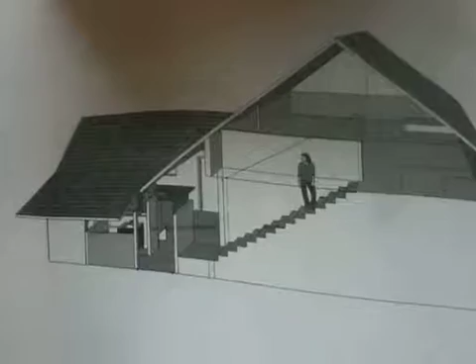Hi, Wells. I got your email and the attachment of your plan project, and I printed them out so I have a better idea of what it is you're doing.

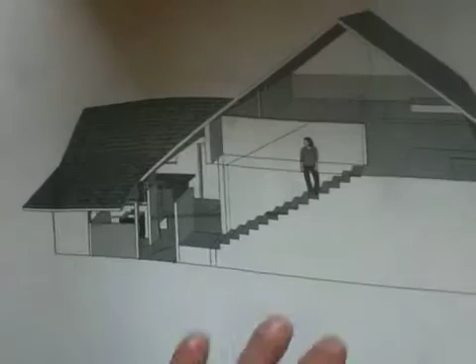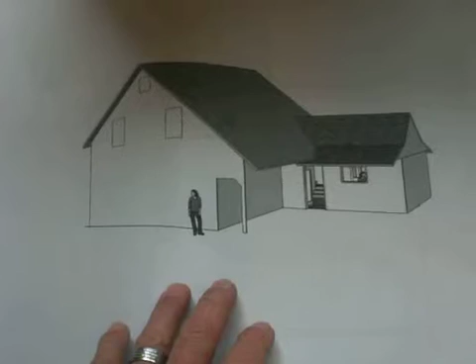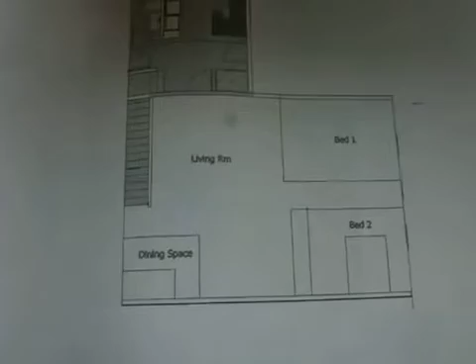I know you're not done with the design, and it's obviously a little difficult to quote on any kind of a figure based on these plans, but we will need obviously more information and details as you get up to Sequim, and then fine-tune some of the plans and the design and how it attaches to the main house in the future. But I do have some commentary that we could go over the phone when you're available.

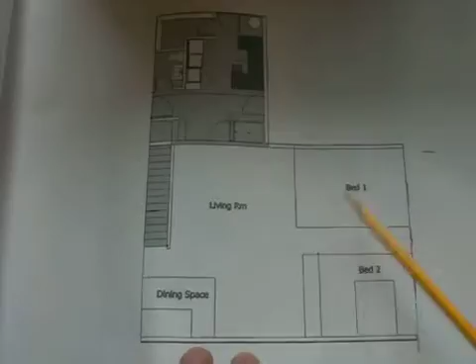So real quickly, there are issues with septic and how big, and if these are going to be permanent bedrooms. Don't want to use up bedrooms if the system isn't going to be big enough for the final house. That would be over here.

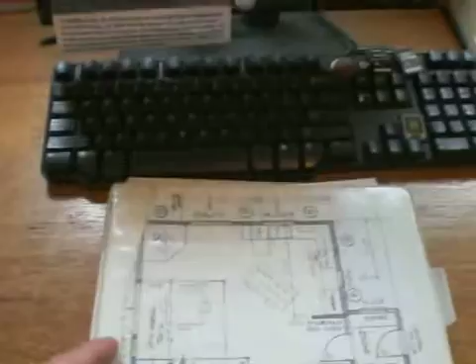So once this section of the house was done, they moved into this half of the house, and then we gutted the first floor over here and rebuilt the rooms for other purposes. So this particular project is here in front of me. Here is kind of the layout. Here's the mudroom I was talking about. And then there was a laundry room which connected to the existing bathroom, stairway, dining room, fireplace, kitchen.

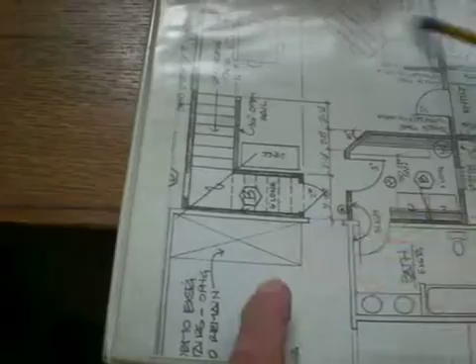And then this was the old stairway, which we gutted out 2 years later. They were living in this half, but we gutted that out and refurbished that whole area so the upstairs had a new entranceway. So I'm getting to some other financial details. So that's the kind of plan that we're going to need professionally for the city.

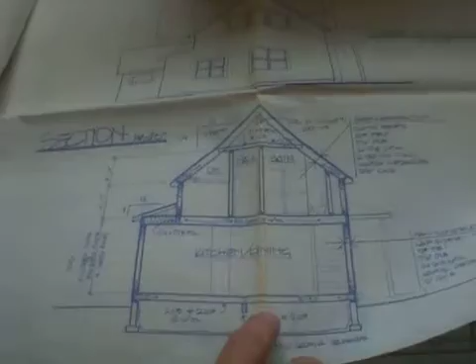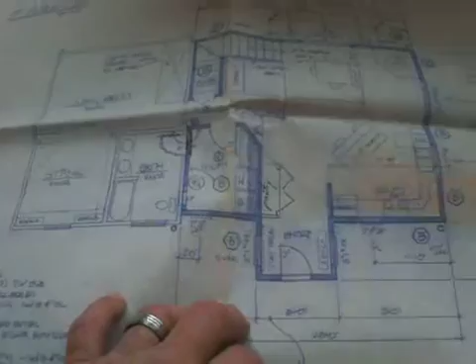So city or county, whichever, we need quite a bit of good detail from the architect or plan drawer. I mean, we could do it ourselves on a napkin, but the city and county, they want some pretty good detail. We are able to make some detailed changes inside as we go along, but not great massive changes. Here's the upstairs. So we have bathroom, walk-in closet, and a stairway up there. And then they connected the upstairs here to the other upstairs here so that they can get to these bedrooms.

And related to sizing up the two different projects, yours and theirs, their main floor was 720 feet, 560 for the second floor, for a total of 1,280.

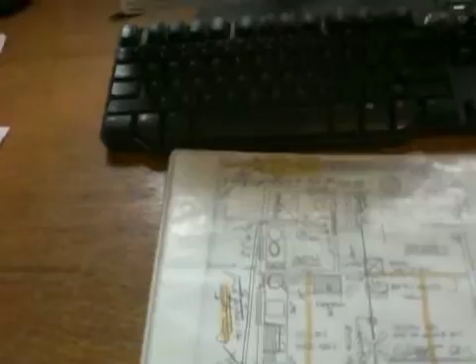So this is the kind of binder I put together for the course of the project, so we know what is going on. Here is another one, which is probably... where is it now? Stand by for a second. Oh well, five. Here it is right here.

So this old little cabin, there's a main house next to it that you can't see, but it was old, probably built in the 60s, based on the building techniques. And so we gutted that out, started all over, took off this addition they had on the front, and redid everything. We had to level up the concrete floor. So in this particular case, new roofing, new walls, interior.

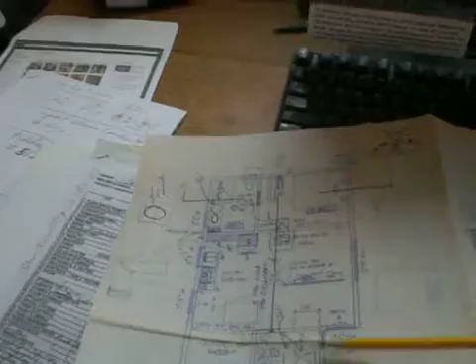In this case, we took what was existing, started over, and did everything on the inside. New cabinets, new sheetrock, plumbing, everything. When we gutted this out, it was completely down to studs and nothing was inside. And so this was insulation, finish, and that was a 24 by 30. Let's see. Technically there was an existing bathroom and bedroom in it, so we got away with existing kind of structure. But in that case, we did the whole project 24 by 30.

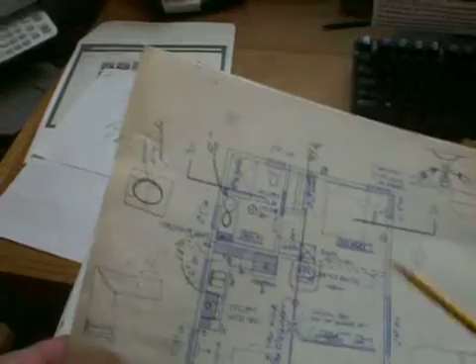We were about $55,000, and that, once again, my numbers never reflect Washington State sales tax. That's always in addition. But once again, these are the kind of details that we need. We did all electrical, plumbing, started from scratch, new kitchen, kitchenette, little. How this relates to you is it's just a small kind of structure, like kind of what you're talking about, until the main house gets built.

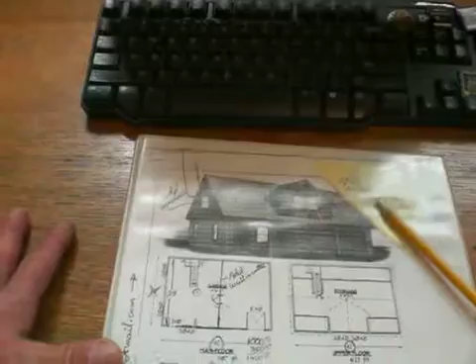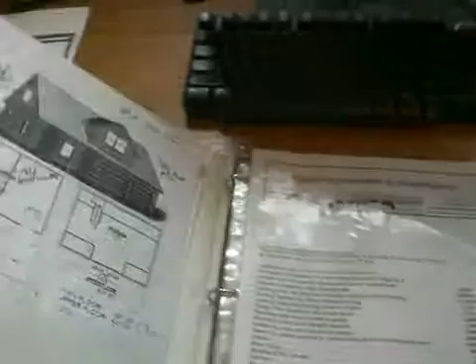This one here relates to you probably pretty good too, because this is very similar to your project in the fact that this was a 24 by 40. Here it's a 2-bay garage, and then this was a workshop. So your plans best resemble this type of a structure, where you've got workspace, storage, and your hobby farm details below. And up above, there were no wall divisions, but upstairs they were going to use that for guest bedroom, office space, storage, and craft room.

So in that particular case, we did excavation, foundation, removal, stumps, concrete, framing, roofing, framing material, garage door, plumbing, electrical, insulation, sheetrock, garage, stairway, gutters, boom truck, Sani-Can, all those details, getting the beams lifted by a boom truck, all the Sani-Cans that we need to use the restroom, all that is in there. So we stopped at that point. They then continued on with any cabinetry and finish work that they wanted to detail the inside.

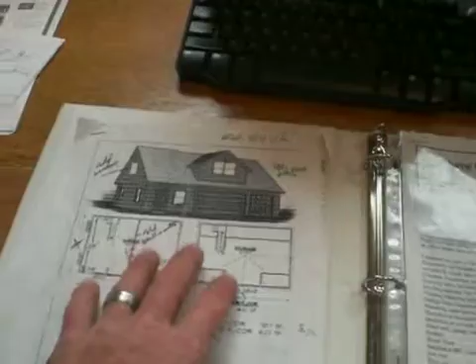And that one, $74,252, so $75,000 to create this project, soup to nuts. So that's a 24 by 40, 2-story, 1 bay, 1 shop, first floor, office space, storage, craft area, 2nd floor. So these kinds of numbers will help you get an idea on your budget needed for your project.

And this one was the little farmhouse we did I told you about. In this particular case, we did excavation, footing, foundation. We did not do the septic. None of these projects had us doing the septic and/or a well, which if you call, we can talk about well costs. I talked to my excavator about well costs and septic details. So this little house, 1,260 square feet, plus a porch at 252 feet and a garage of 552 feet.

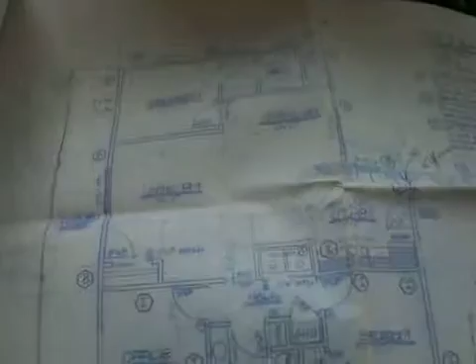Let's go here. I'll show you this one here. This one right here, this was a long while ago. We added on to this whole section of the house. So it started with 2 of these window sections, and then we added this whole part here and then this back part. This was similar to yours. That's probably 14 years ago we did that one. I'd really have to dig up those numbers, but that's kind of close to your project. Living space above, garage down below.